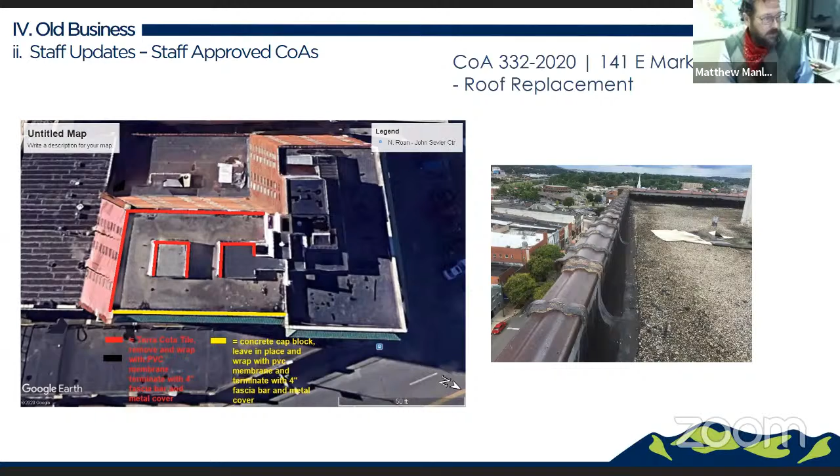As far as updates on upcoming initiatives, I don't know if Hal, if you want to add anything about the potential grant application for the rewrite of the Tree Streets design guidelines.

I will add that Charlie Stahl submitted information to the state for a historic marker for the Memorial Park Stadium—I guess I should say Memorial Stadium, over here across from City Hall. I've just forwarded that application to you all, so you'll see that in your email. Really appreciate Commissioner Forsyth hunting down and doing some research and finding some good information that I think was utilized in that application. I haven't dug through it myself, but I think it pretty much all leans on research that was done by Commissioner Forsyth. So we thank you for that.

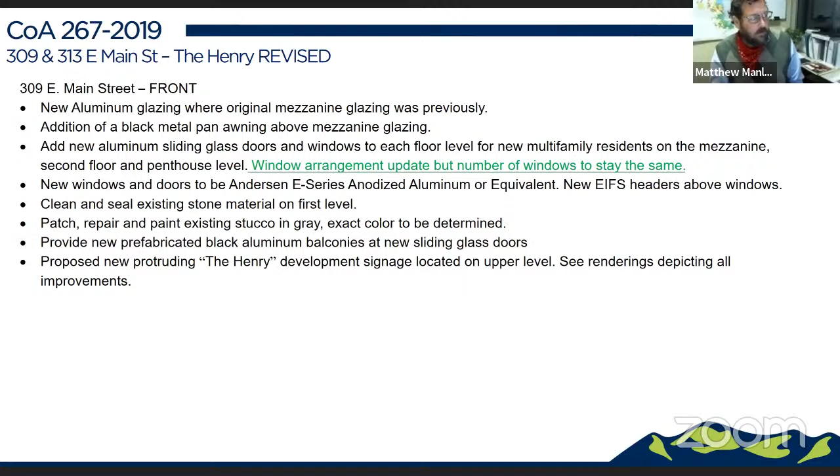So Ryan, what I'm showing you here is just the modification to the description. We're adding a line about the window arrangement on the front of 309 East Main Street. What's proposed is a single window, then a set of double windows, single window, on the second and third floor. What was originally proposed was three sets of double windows.

So one set of double windows has been split out, and I think it actually creates more transparency and equates to the same total window area, just a different configuration. I think it has a nice rhythm to it. I've got some of the design guidelines pulled up, and I think it meets with those. Staff recommends approval of that new window configuration.

So if you want to discuss that and voice any concerns, you could either do a motion, or we can get a consensus and move on to the next part.

Actually, considering we needed to have a public hearing for this, we probably have to hold any motions until after the public hearing. I didn't think about that at first. Yeah, I didn't either, and that seems very reasonable. Let's do staff questions, go through the entire thing, staff questions, public hearing, and then come back through each item to have a deeper discussion after we do the public hearing. Sound good, Nathan? Yes, that sounds very... Okay, good.

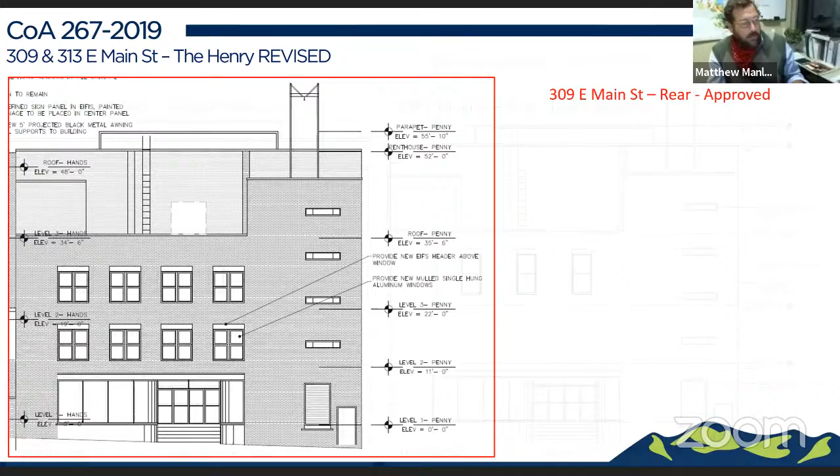They originally proposed a 3x5 window, single window with a single row of three. They've come back since meeting with the design review committee and enlarged those windows to 3 foot 9 inch by 7 foot 4 inch, significantly enhancing the size, but still significantly different from what was originally proposed. You can see on the right side the rendering of how it was originally proposed when this was approved in 2019.

This is the way it is today. Again, this is what they're proposing. The design review committee met and discussed this with them. There was not a lot of opposition to going from double windows to single windows because of the Art Deco style of this building, both on the front and the way the horizontal or vertical windows are arranged. That's a unique window design layout, so single windows does fit into that, it is compatible with that. So there was not a ton of opposition. They addressed some of the concerns by increasing the scale of the windows.

But there are still no mezzanine windows. So it's my opinion, my recommendation, that it's okay to approve the three large windows on the second floor, but I would recommend denial of eliminating all the windows on the mezzanine level. I want the applicant to have a chance to present their side on that.

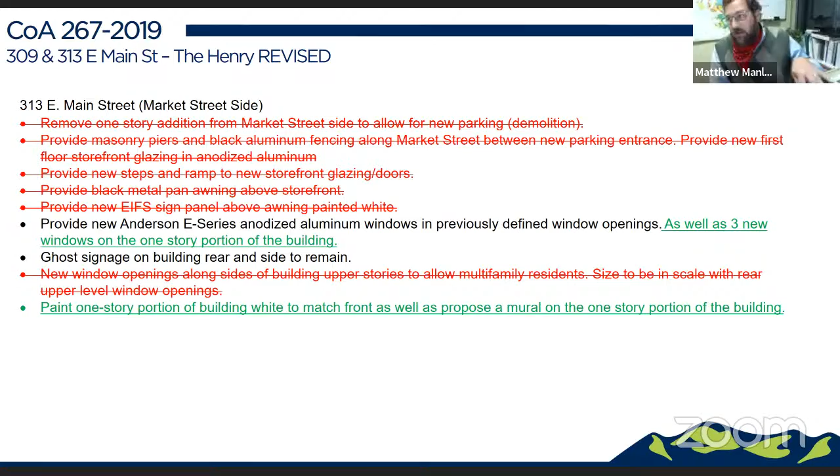Moving on to 313 East Main Street, the rear side. Again, this has a lot of markups, mainly for one big reason. The original proposal was to remove an addition on the back of this building, shown right here. This structure was proposed to be removed, and a storefront and parking area with a street wall of brick and wrought iron, and a ramp for access, was to be put in place. All of those things have now been scrapped.

They want to leave that building in place and utilize it for residential, which is a new allowance within the B2 zoning district. That helps reduce cost and demolition cost, and also helps with some support and structural issues they were facing if they demoed that building.

So how do they treat it? Going from that proposal, they proposed this on the left, which was to punch in 3 windows. They had a good location, above the pedestrian realm, providing privacy for the residents, but the scale of the windows and the spacing was a little off. That was some of the feedback they got from the design review committee.

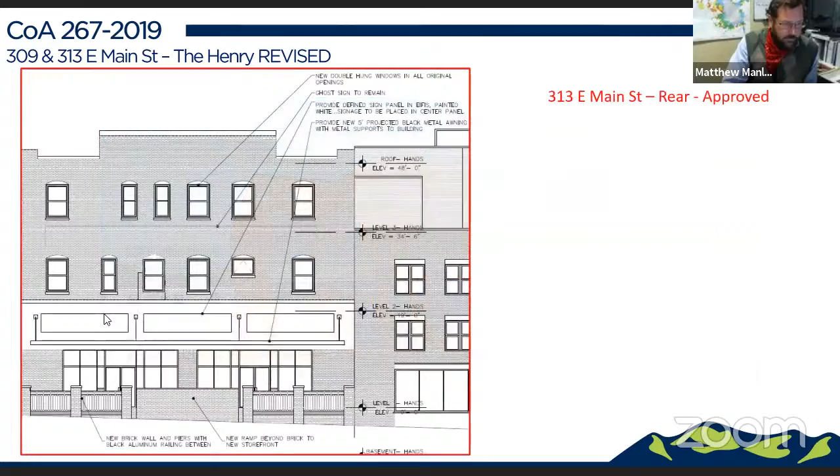They responded with this proposal shown on the right, with larger scale windows, 3 foot 9 inch by 7 foot 4 inch, spaced a little differently as well. I think that does accommodate the type of rhythm of openings, and accommodates residential uses on first floors, which is unusual, but it still creates the type of pedestrian environment we want on Market Street.

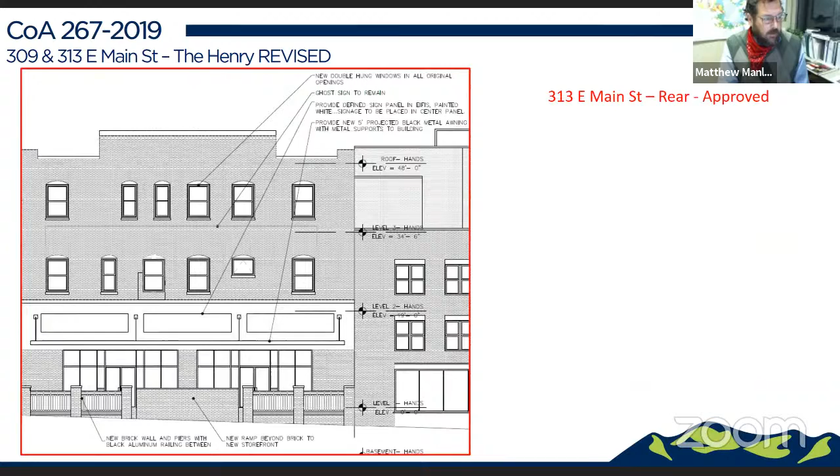So I think in this case they've really done a great job. You can envision the large windows going in there. I think they've addressed the design review committee's concerns and presented a good product here, and it is in line with the design guidelines. So staff recommends approval of the modifications to 313.

Matt, are those top two floors recessed? Is that all just one straight facade? They are recessed, you can see there. So I thought that bottom one would be the first row, first floor, and then setback on the next, is that right? That's correct. So you can't really see that top floor. That's a section view, not a real perspective view. And you wouldn't really be able to see that.

Now there's additional discussion about potentially painting this brick. It is a different brick; it was an addition, not built at the same time. The applicant initially was proposing that, and potentially a mural here. But what they've planned to do is put the windows in, see if it really then calls for painting this to clean it up a little bit and give it some distinction and compatibility with the front of the building, because they are proposing to paint the front of the building, but they're going to wait on that before proposing to paint this brick.

They're going to do the windows first and then see if there's a need for painting it, or any kind of mural to encapsulate any additional space. I think once the windows go in, there's not going to be much room for a mural, though something creative could be done at the pedestrian level, just to line the bottom of the building. Could be neat, but not a typical place for a large blank canvas of brick for a mural, but not out of the question.

Any questions? Having sat in on the DRC meeting, I don't have any more questions for you. I don't know about Wes or Liz. I don't, except for that setback. But the other one would be the windows, but you can discuss that. That's a little hard to understand, but yeah. Right.

Okay, public hearing, Nathan? Yeah, let's go ahead and open the public hearing. There should be a number appearing on the screen here for those that wish to call in.

Oh, sorry. Oh, you're good. There we are. If you'd like to call in, you're watching this live streamed online, Matt will have that number up for you. Right. Okay. Yeah. I'll send Matt an email if you would like. So we will begin our.

Do we have a phone call? No, sorry, that was mine. Oh, okay. We never get phone calls, so well, let's, it's a real.

There's a 20-second delay, so I would recommend that we have the applicant go ahead and start and give their presentation. If anybody else is listening, they can call in. That sounds good. Yeah, if y'all, okay, go ahead, please do.

Phillip, do you want me to talk or do you want to talk? Let me talk first, and then you can get into the technical stuff as well. Okay. So I just wanted to say, one, that I appreciate everybody allowing us to present this project tonight, and taking the time that you guys have taken to spend down here, and making an effort to be on the city staff to help out with this stuff.

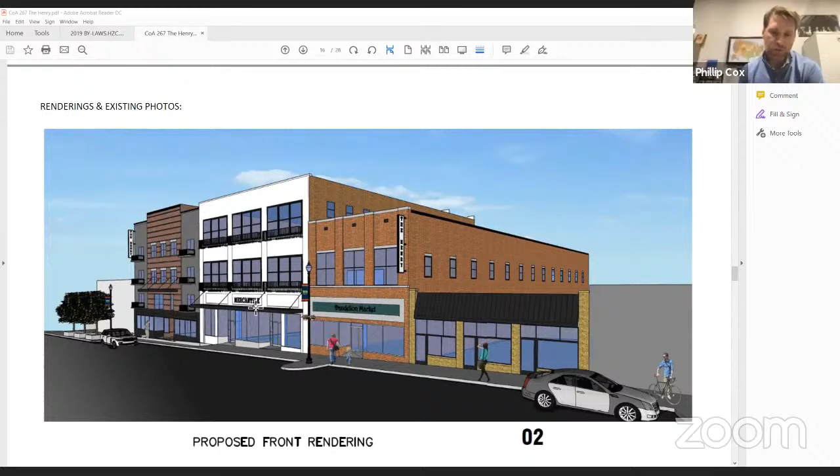So the next building would then be the Hands building, and our real goal for that bottom floor is really in hopes to have some kind of restaurant or some kind of fun user. We were really hoping we could get maybe the distillery that was looking to go on Walnut Street and put them in there, and then have like a restaurant on the second level of the mezzanine.

But the reality is we don't know what that's going to be yet. There's some bathrooms in the back right now. And what we want to do is get the multifamily started, because we're ready to move forward with that, and we want to get foot traffic and people in the buildings and going.

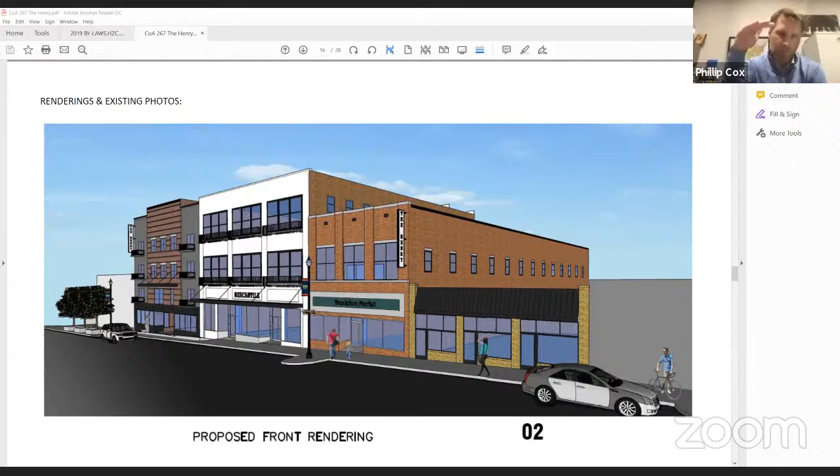That was the logic behind making the changes to the Sears building, the Hands building, which we appreciate staff's approval on. And then also the changes to the front of the JCPenney building, which again we appreciate staff approval on. That's more in line with where the bedrooms are laying out. And then on the back side, again we appreciate staff approval on the upper level, because that's in line with where the bedrooms are.

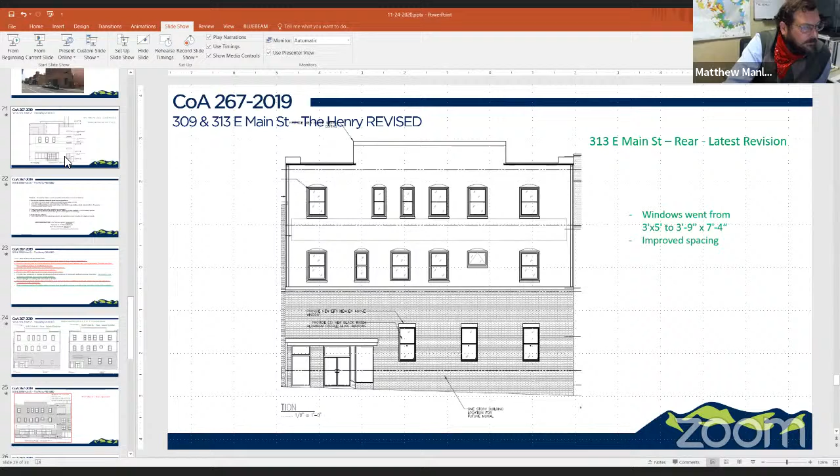And Matt, could you show that back level, the Penny building? 309, correct? Yes. So again, staff has approved, or suggested approval of, the top windows.

Again, that goes in line with the configuration of the multifamily. The reason we're asking for no change on the mezzanine level is because we just have no clue what we're going to be doing there, and we have to be able to move forward with the multifamily in this project.

Which will be on actually the third floor — I don't know if it's considered the second floor, but wherever those windows are. And then there's like a penthouse type area above that, which we'll be putting some units in as well, plus we'll be filling all the units in the Hands building.

And the way I'm understanding this is, in order for us to get a CO, we have to be completed with all the improvements we're making for the multifamily, and we don't want to start the project if we can't get that CO. So that's why we're asking for no change on the bottom.

When we have a user, we will come back to you guys with a proposal for that, because at that time it's going to make sense to do something different. But right now there's an existing bathroom — I think Kattie, if I'm correct, is kind of where one of those windows would have gone — and there's no reason for us to demo that bathroom if a restaurant may need to use that one day and we need to modify it, but we just don't know what we're going to be doing there.

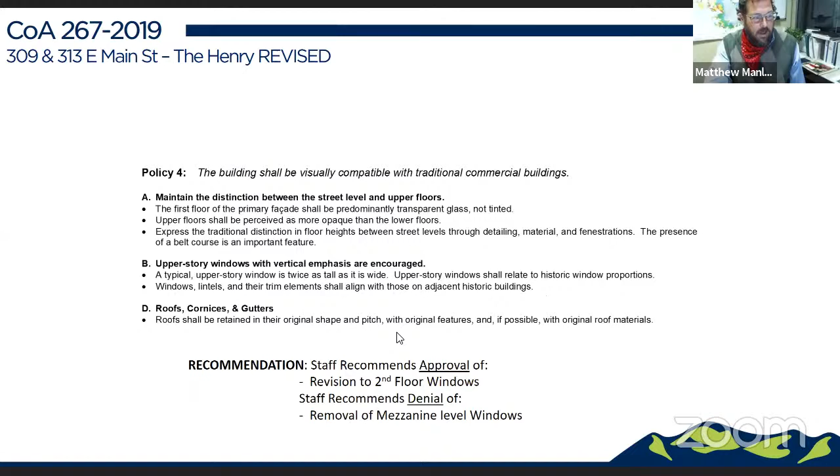I think one concern voiced in the design review committee is that, from the Historic Zoning Commission's standpoint, what was approved is a storefront, full-on appropriate downtown commercial space fronting on Market Street. And now to go back to this, which is, for lack of a better term, a watered down version of the back of this building.

With no guarantee that it's going to be addressed in some fashion moving forward, if they were just to eliminate what had already been approved for the second level. So that's a risk that the Historic Zoning Commission is being asked to make.

I'm curious if there's any potential, if this gets approved, if they're okay with the approval of the modification on the second floor, if you would be okay with adding that same configuration and scale so that it's reduced from what you originally asked for and were approved for, but it doesn't completely eliminate it. So I just want to add that to this discussion.

Jay, other commissioners, feel free to tell me that's dumb. But I think this is maybe a compromise versus, yes, I see how, if you had more information and more knowledge of what was going to go in there, then you could accommodate more specifically. But we don't have any of those specifics to then back completely off of what was already a really good proposal and approval originally in 2019. Does that make any sense?

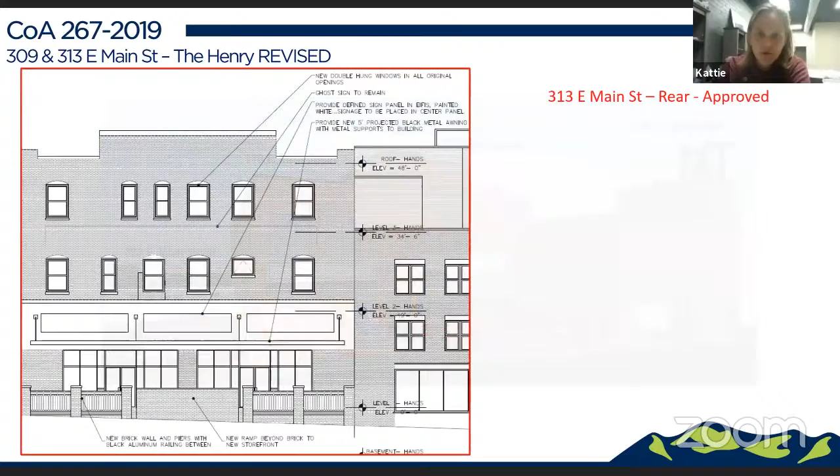Okay, the applicant, any other comments based on what you've heard? So I don't want to speak for Phillip, and I'd like him to comment, but I don't think we are 100% opposed to adding the windows like you were suggesting, Matt. They would have to be smaller, they wouldn't be able to be as tall vertically, because that ceiling is not a tall ceiling on the mezzanine level.

Again, we can't justify putting in storefront like we have on the front of the building, but I would love to see that happen if we had a user for this building that was going to take it. So I really hate the idea to just add additional windows that will meet the potential approval but could have been a whole lot better if we waited for a user.

Yeah, and I appreciate that input, Kattie. I guess I feel like the commission's question for y'all would be, what guarantee do we have that something will happen? Because the current proposed windowless mezzanine level is not really acceptable, but putting something else in there sounds great. Right, it's something we could totally accept.

So one other question I have: you guys have a development agreement, Phillip, with the city, as the city was the seller. Does that come into play with this at all? Is there a timeline? Is there anything else you can add from that side, or is that not relevant?

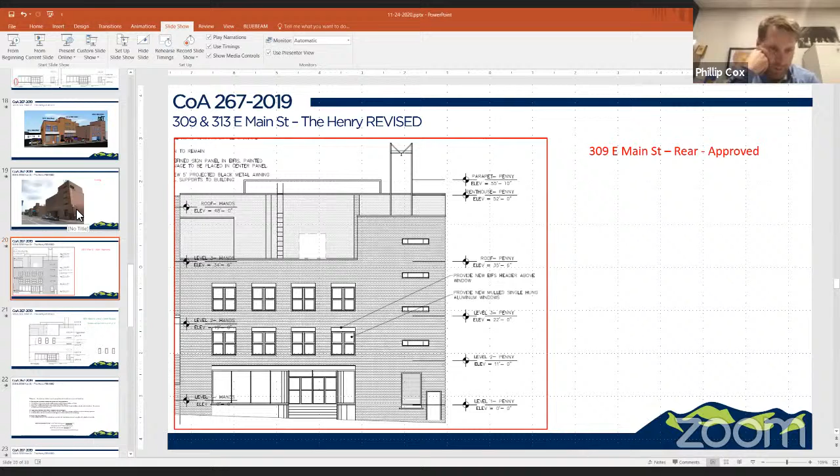So the one thing I think Kattie kind of nailed it. If you all want us to put those same windows in that are on the top as the bottom, we can do that. But that's what you're going to have to live with. We're not going to ever change it if we do that, because we won't be able to ever change it.

Or you can take a little bit of a leap of faith with us and say, hey, look, we don't like what we're seeing now. But honestly, guys, that's what you got right now. If we do nothing to this building, that's what you got right now. So take a little bit of a leap of faith with us.

We've done nice stuff throughout the community. We've also done a nice job on the first two buildings. So we're going to try to do something nice on this mezzanine level, but we have to be able to start these apartments. If we can't start these apartments, then we are not going to do anything to both of these buildings, and we're just going to quit, because we have to be able to put this multifamily in, or it's just a dead project, period.

I guess that was my question about the development agreement, about how that went, because I know the property was sold. And we're happy to sell it back to the city if they want to develop it themselves. So the development agreement is a development agreement. It's not a contract. It's a, hey, we're going to try to do the best we can kind of thing.

One of the reasons I mentioned before is that Abernathy designed this facade the way it is without windows there, and he did that on purpose. It's designed to not have openings there, and I think that's part of the problem, that we're trying to put windows where it was originally intended to be a blank wall.

So whatever we do there needs to honor that, and it needs to honor the style, the Art Deco style of the slot windows, and with this brick, it's got the brick detail, we got the curved storefront, all that stuff we talked about before, but it needs to honor these things.

You also kind of functionally, there's a louver that's sort of over the entrance. You can see it in the street view. There's some other things that just kind of functionally get in the way. Maybe that's not an issue, but it's another element we haven't really thought about or talked about.

I do have a question for you guys though. The brick detail that shows on the facade, to the left of the actual windows in what I kind of think of as the tower area - it doesn't show up on your elevation. Were you intending to do anything with that? No, we plan to leave that as is.

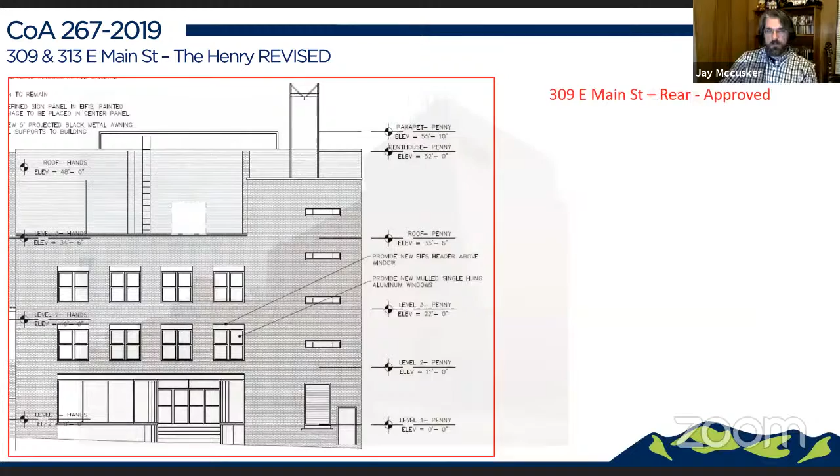Okay, because that changes the composition of the facade. By not having it there, that space that reads between the proposed windows and those existing horizontal windows isn't really there.

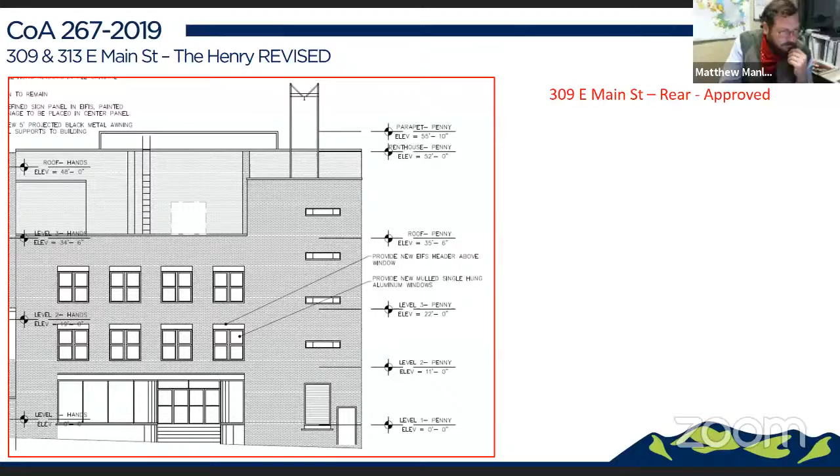So when we look at this, I think it's important to look at the elements as they would actually exist. But I'm glad you're not looking to do anything there.

So my next question is, have you considered doing anything on this upper floor other than trying to center them on the storefront? My question would be, I guess what I would ask is what thoughts do you have?

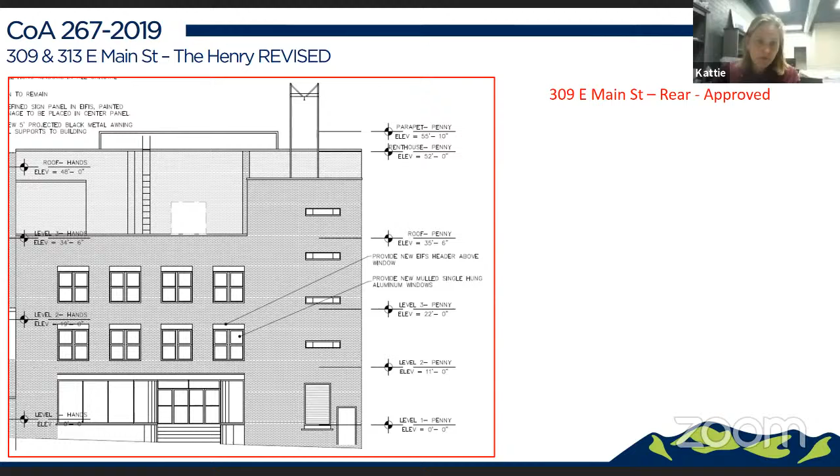I'm thinking, Matt, if we could go back to the current proposal, thank you. There's a proportion to the storefront windows as they exist now, and it reads very well in this drawing that it's basically a strip of storefront divided into roughly 7 equal sections. It's a little bit different at the door and where the curve comes back.

But if you push the windows to the left and center them on every other panel and just do those 3 windows, I wonder if we might get a better composition on this facade. So that's why I wonder, have you looked at anything that was not symmetrical? Because Art Deco design is not a symmetrical design by and large, and this facade certainly isn't.

So would you need, I think, 4 windows? What we need is a non-symmetrical solution, because we're trying to put traditional windows, quite frankly, into a non-traditional building, and that's, I think, part of what the issue is. I'm just really appreciating what you're saying here, Jay.

I would be very interested in hearing y'all's perspective, Katie and Phillip, based on that feedback. If you guys could think maybe outside the box a little bit.

Well, Katie's probably best to answer this, but obviously where the horizontal windows are, that's a stairwell, so you can't get too close to that. I just assume Katie put these windows in line to meet with where the multifamily units were, and I assume that's either a bedroom or a kitchen or living area or something like that. So I don't know how our floor plan aligns with that.

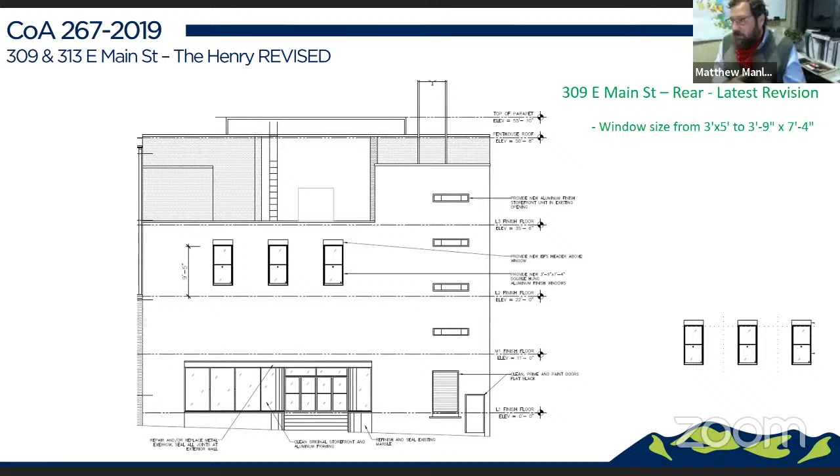Well, I want to know, I guess in the form of a question, this is going to go right to Katie, and I know she should respond to the earlier one as well, but what is the relationship of these 3 new windows to the existing facade? And I'll just kind of leave that broad question, and I just want to know what the thought process was.

Sure, so I can tell you part of it is definitely floor plan driven, but if you go back -- can we go back to that, thank you. So what I was trying to do is if you look at the second panel of glass of the storefront, they do align with each other. And then that second window aligns with the storefront below, and then I kept equal spacing between the windows.

So that may have been, you know, ill-advised based on what you'd like to see. One thing I can say is if I can move that window over, if I align the left-hand window with the left hand of the storefront, I don't feel like that hurts anything.

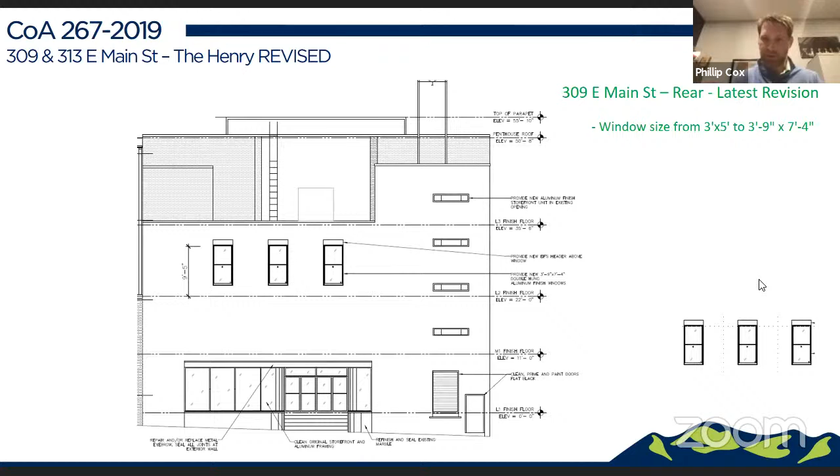This is for anybody—if this was left blank, is there potential for a sign panel or something that would break up that space?

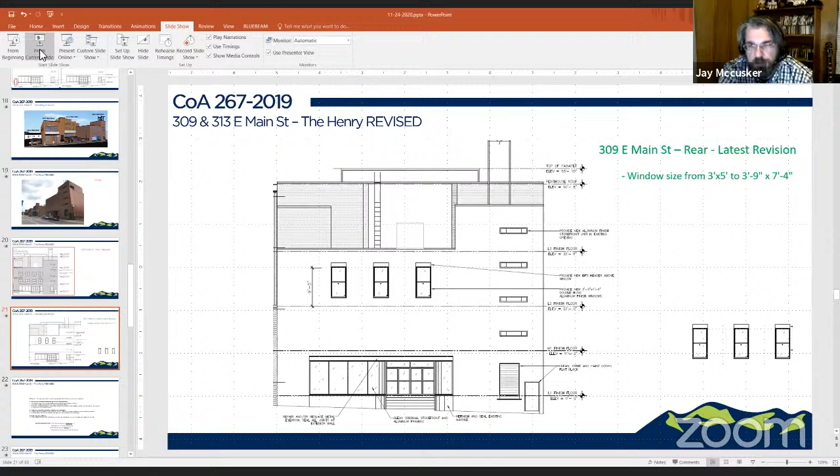I think honestly that it reads as, you kind of think of it as white space. It's the space in between that gives the elements you do put there more importance. Yeah, I would agree—I think it's there on purpose. If you leave it just as blank space there, it kind of fits in with some of the more modern Art Deco type situation. I don't think it needs to be a sign panel or anything of that kind.

So if that was left blank and there was just a modification to the windows, from a motion standpoint, I think you could frame a motion so that the applicant makes some final revisions, submits that, and staff would approve those modifications to the rear of 309. And if you have no issues with the front of 309 and the rear of 313, then you would just motion to approve those as presented.

If there is more of a desire to see something on the mezzanine level included, then we could discuss that further. But if people are leaning towards nothing on the mezzanine, I think it's pretty straightforward that we would just have the final tweaks approved by staff.

Kelly Duggan, who is part-time and has a lot of historic experience, some of you have met her—she is on the call. Kelly, do you have anything to add from a staff standpoint about structuring a motion, or anything you've heard tonight that you would want to weigh in on?

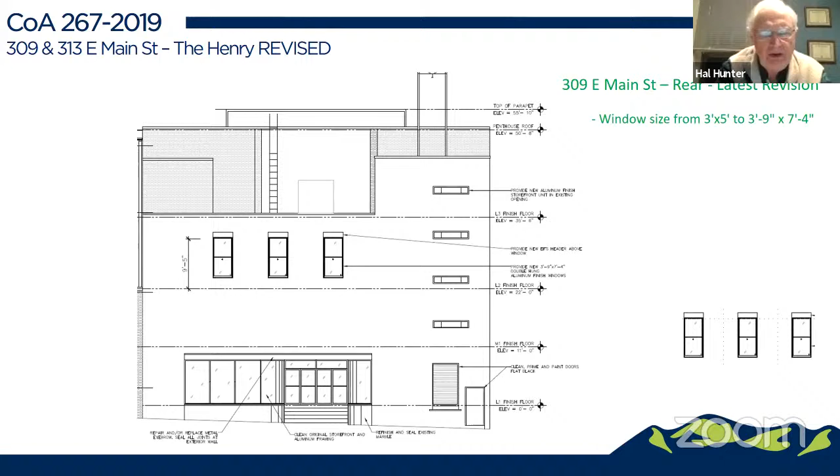Nathan, you got anything else to add, or can we get close to a motion here? I think I would like to go ahead and close the public hearing if we have nothing further. I've got one more question—are we talking about public hearing on the whole thing, is that correct, Matt? Yeah, yeah.

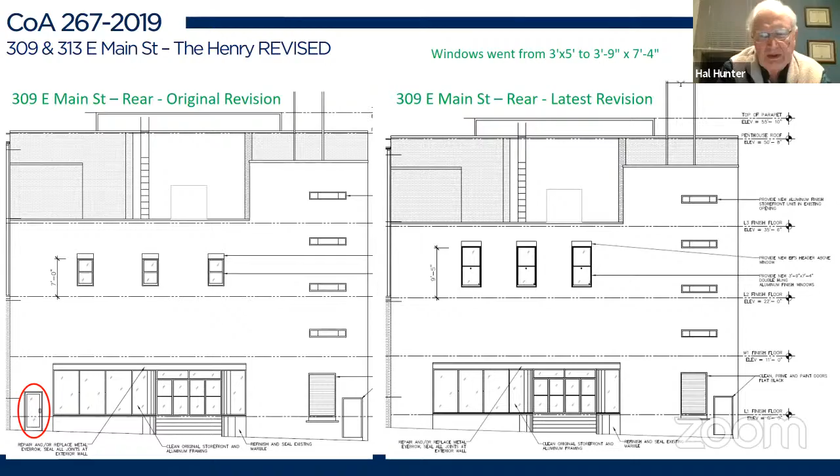I've got a question going back to the 313. Why are they proposing to paint it white? I think they did say something about holding off on painting it at all until they get a look at it and see what it looks like. But I have a real problem with that building being painted white.

I thought that had been removed from the front of the building. You don't see the front and the rear at the same time. Well, I don't think anybody has a problem with that. That's why we pretty much said let's hold off on doing anything, let's see what it looks like.

Okay, yes, we're completely comfortable with not doing anything besides adding the windows. The problem was that was in their original proposal, and it got in the staff report and the presentation, but they took it out of their revision submitted today. The illustration got updated, but the text did not get updated.

Okay, good catch there, Matt. Thank you. Yeah, I do appreciate that. Matt, I know you guys want to close the public comment, and I'm fine with that. And I would love, Jay, for us to talk further if possible, I am 100% open to that. I did send you an email.

I did move those windows, but one thing I want to note - I can't move them in the exact pattern you would want, based on where there's a living room and bedroom, in order to keep them at least within their rooms.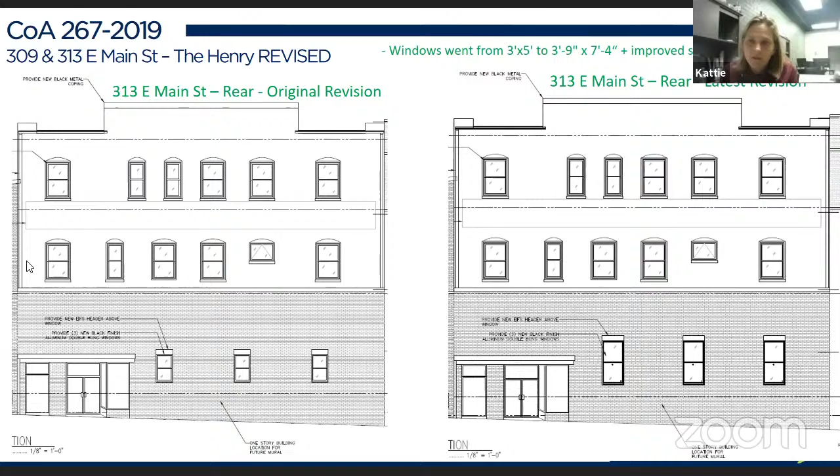On the 309 building - did my email come through, Matt? Yes, I've got it. So I'm just trying to show where I could place those windows to correlate with the storefront. Again, I'm happy if we can work through that together.

I'm more than open to that. I think, just looking at it quickly, it looks very much in line with some of the comments I've heard. I think that's something we can fine-tune outside of this historic zoning meeting.

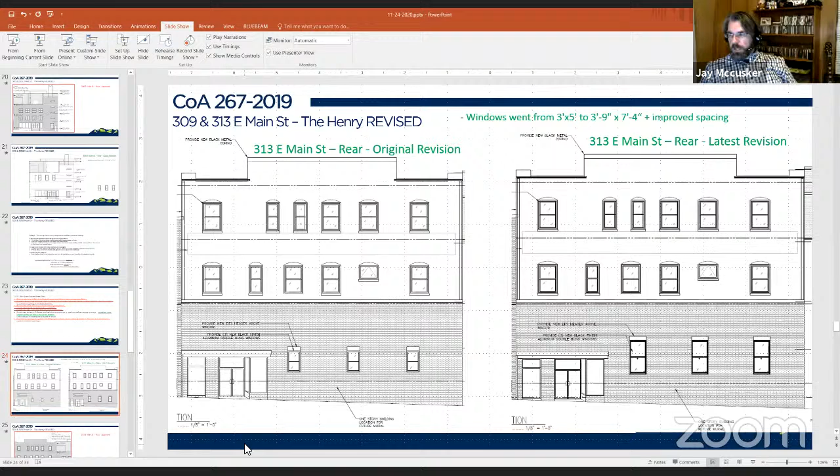Okay, yeah, I want to quickly say - for 313, I think that's much better, I think that works. So unless anyone else objects, I'd like to move to the front of 309. Yeah, that's fine with me.

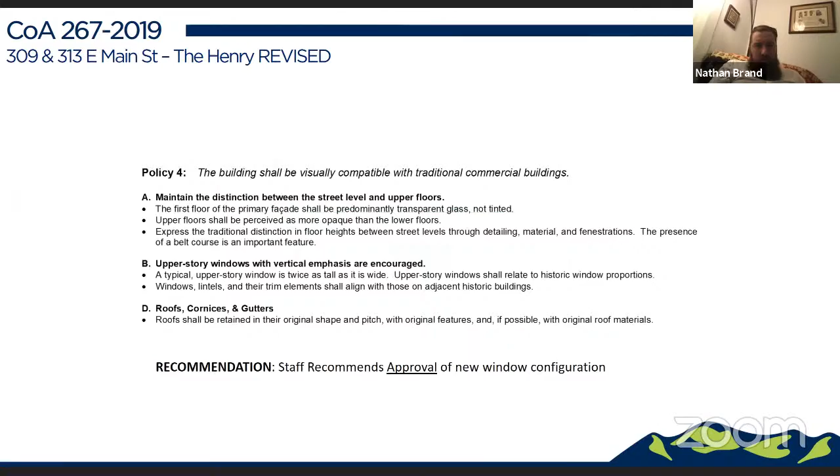All right, thank you. So my question here is, we're rearranging the windows - rather than 3 double windows, we've got 2 doubles and 2 singles, and it looks like the window heads and sills have changed as well. No, the window sills and heads have not changed. Okay, I'm just comparing the drawings, and they show up in different locations - at least it appears they show up in different locations from the original proposal to the newer one.

For instance, the sills of the middle floor, the second floor, align with the panel joint - they kind of align with the head of the panel below, but they do not in the updated version. Yeah, it does look shifted. So I guess my question is two questions: what necessitated changing to single windows on the side - was that part of the original openings you're trying to capture, or what happened there? And then, what is the relationship between those existing panel joints and the window heads and sills?

So the separating out of the windows to have doubles and singles happened because there are columns within those walls. I wouldn't have been able to keep a consistent pattern - I would have run into a steel column if I kept the 3 double windows. So that is what drove that. There's actually a steel column between each single window and the double windows. Okay, that's unfortunate. Yeah, tell me about it.

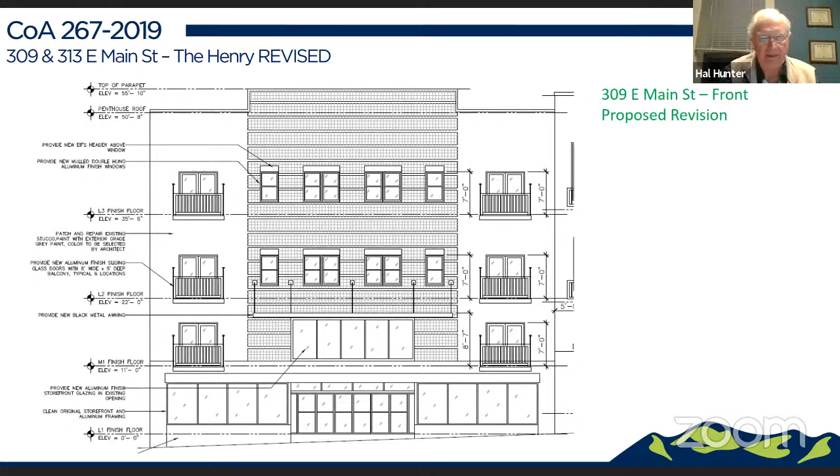Was there somebody else who jumped in there? Maybe it was Jay. I honestly think the relationship between the brick bands and the windows is paramount to those other considerations. Because I look at this and it looks like it's just slightly off. It looks unintentional.

I agree with that. This is a bit of a unique situation. Now, did you say that this building originally had openings punched in this wall, or are these all new openings in the wall? These are all new openings in the wall. The portion that had windows was the mezzanine level.

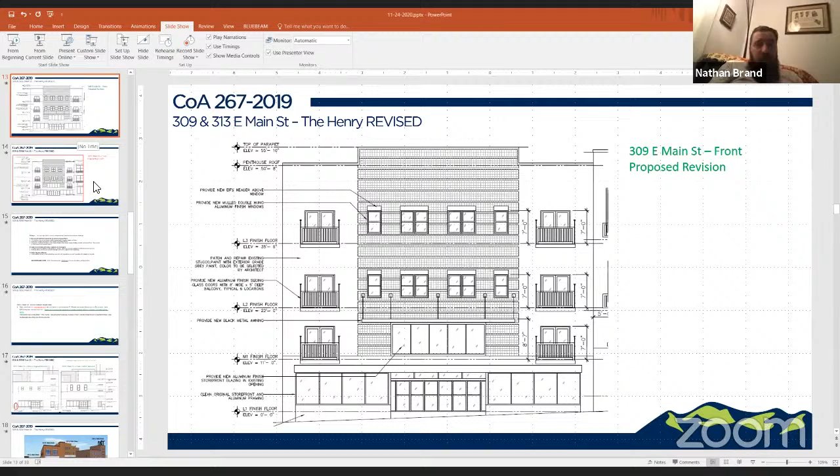Okay, all right. Well, unless we have more questions, the next step is to close the public hearing. Do we have more questions for the applicant, or should we work on our motions here?

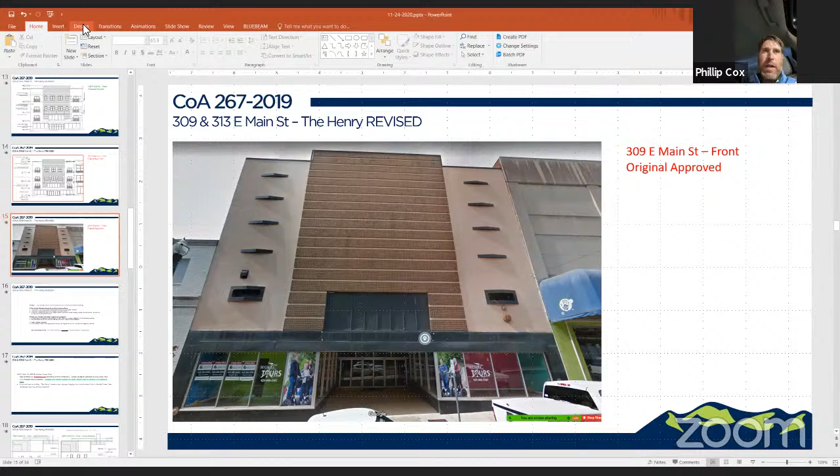I would suggest we close the public hearing. I think we're close to a motion here. I think we did note that Jay had further detailed concerns about 309 Front, but I appreciate those comments. Honestly, that's the first I've seen that revision. I don't think that was part of our discussion last week, so I was surprised to see it. Yeah, it does seem to be slightly different with where it aligns with the brick.

Now, I can tell you that it is not different from last week. Nothing changed from last week. Yes, that's right, there were no modifications on this. We did not dive into detail on this one in our DRC. We were focused on the rear.

So again, it sounds like slight modifications might need to be considered, some tweaks through DRC review. I would recommend, if there's no overall objections to the splitting out of the double window to single windows, that's the main revision. And if there are some slight tweaks between what was originally approved in 2019 and where these windows, headers and sills align with some other architectural features, and that's slightly changed with what we've received today, that we can review that before final approval, just like we would review the slight modification to the rear windows as proposed. So again, a motion for final approval through DRC review, but generally, general consensus for approval as presented.

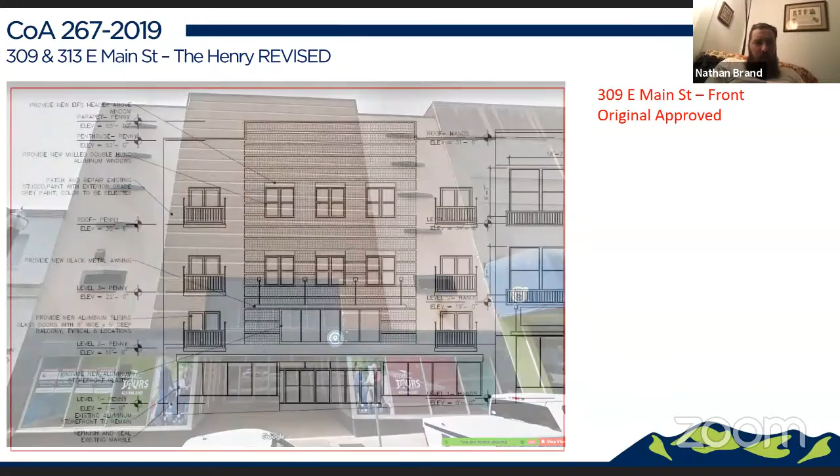All right, well, I'm going to go ahead and close the public hearing then, and we can begin the deliberations. Seems like, Matt, you want to help us just go through, and Nicole, if you want to make sure to take notes here. It's going to get complicated, I think.

So, 309 Front, it would be as proposed and presented by staff, with additional consideration for final placement of the windows with approval from or review by the DRC and staff approval.

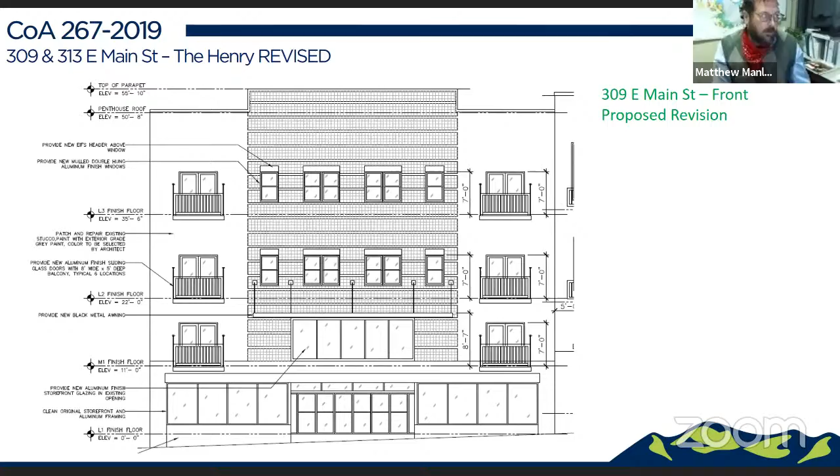I would be comfortable with a motion to that effect. If you do this with the DRC, do you come back to us as the commission, or just go ahead? No, you would essentially be giving staff approval to make the final approval. So it wouldn't come before us again? Correct. Staff would make the final approval on the recommendation from DRC.

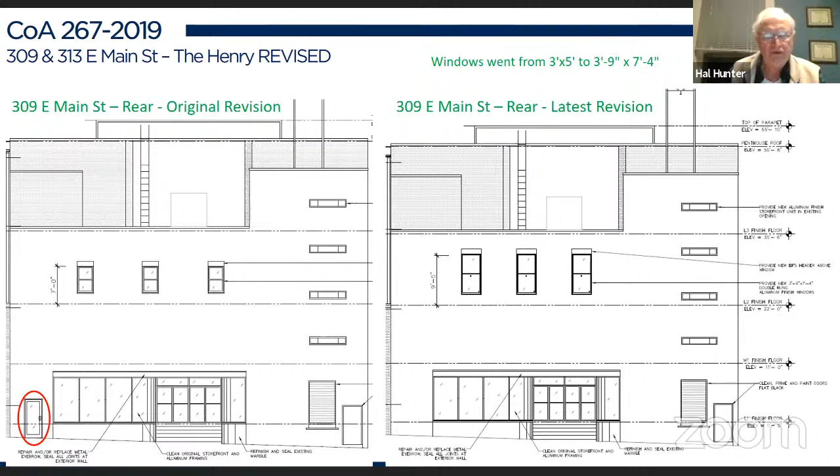Gotcha. All right. I would move that on the facade for 309 Main Street, that we approve those changes with the understanding that the windows will be lined up with the brick banding and be brought back to DRC for final review before staff approval.

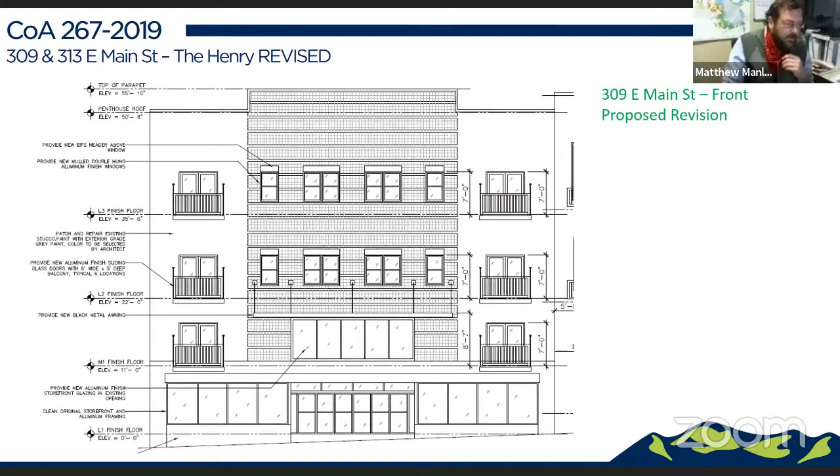We have a motion. Do we have a second? I'll second it. I do want to point out the differences between what was originally proposed - it doesn't all align with the brick banding. Only the second floor does. The third floor does not.

So I don't know that it'll work just perfectly like that. We also have heard tonight that the representation of the brick may not be precise. And so what we want to do is have the DRC review it and give some specific language to the applicant of what they're okay with, what they need to look for when they've got the specific brick, what they need to attempt to accomplish when they go to put these windows in.

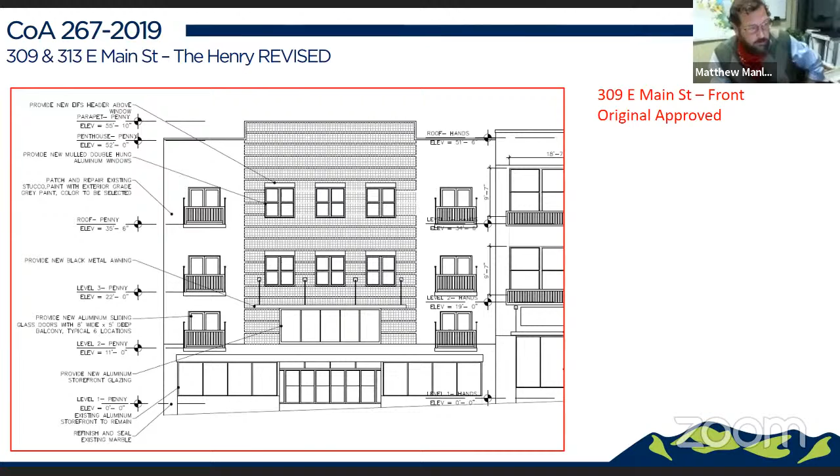I would just say, as presented, as approved, with final consideration by the DRC, with staff doing administrative approval, and we can have a more detailed conversation at the DRC level. And we're saying that would be a blanket statement for all three facades, essentially.

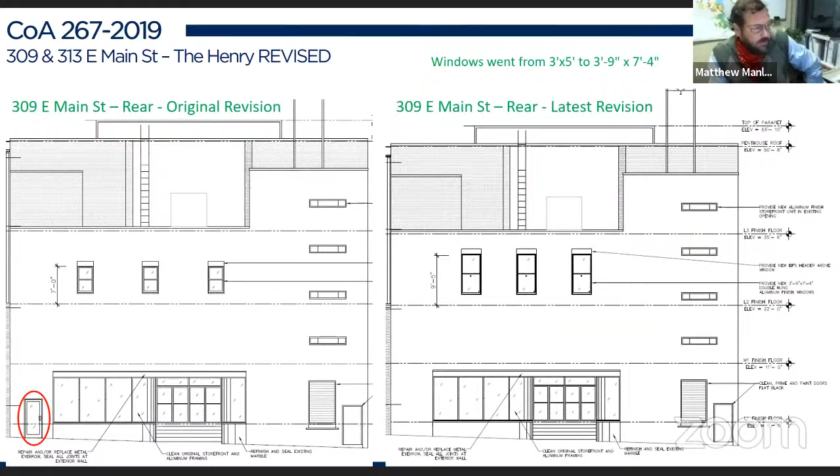Yeah, except for - I mean, you could do that. That I suppose works, maybe just for 309, and then 313 is fine. Yeah, and that may help this applicant go ahead and get started on 313 with some. Right. But I still expect this to be turned around really quickly.

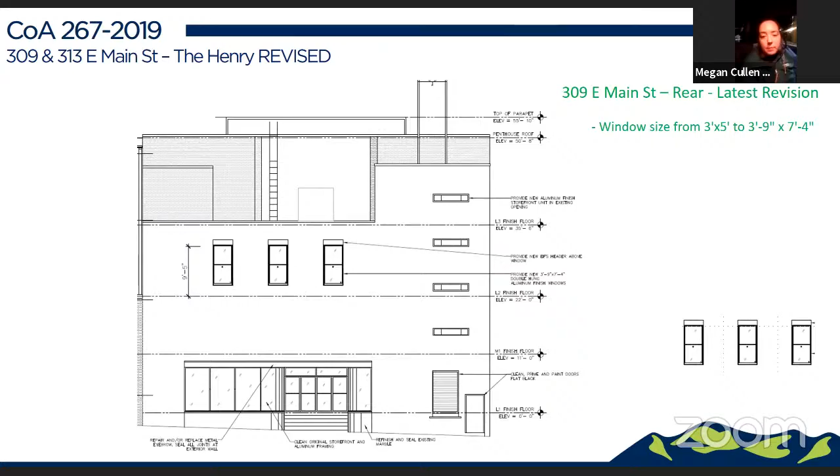Agreed. I would just like to throw out too, I don't think it needs to be part of the motion - I would feel more comfortable if the chairman sat in on the DRC meeting. I know Nathan, you're an alternate already, but I think if we could be at full capacity for going over this - I personally would like that, but I don't know how everyone else feels.

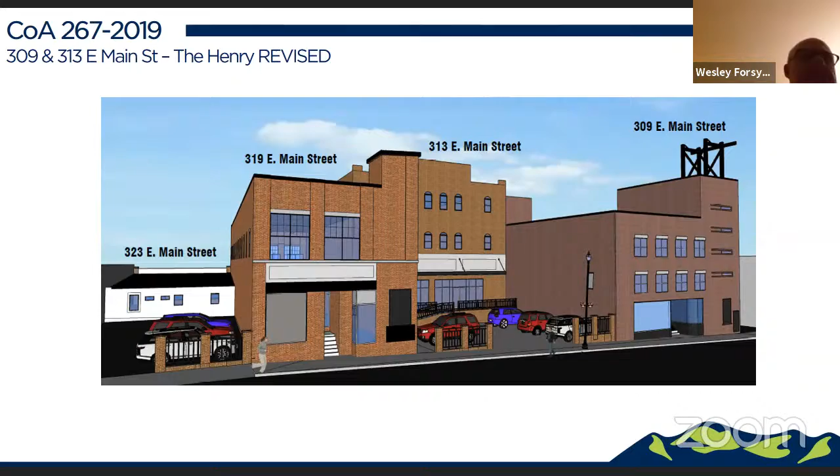I'm happy to do that. Thank you. Yes, sounds good. Absolutely. So, Hal, you were making a motion.

Yeah, I started to make a motion, and this is basically on 309 on the Main Street facade, that we approve that with consideration - how do I want to phrase this - with consideration for looking at the placement a little more clearly and aligning them up as best as possible, maybe with the brick. Depending on how that works, I'm not sure exactly how we can phrase that.

I would just say: final alignment of windows, consideration to existing architectural features. Right, that would be good. Because I really don't have a problem with the original where the upper floor kind of cuts into that one band. But the first floor, as Jay pointed out, I think that is significant because you've got the band and then just maybe one or two bricks above it, you've got the window starting. And I think that is distracting.

Well, we still need to confirm that what's in reality is also what's shown in the illustration. We don't know that yet. So we've got to get additional information. I'd like to see it all as one motion. Well, I would add on to that.

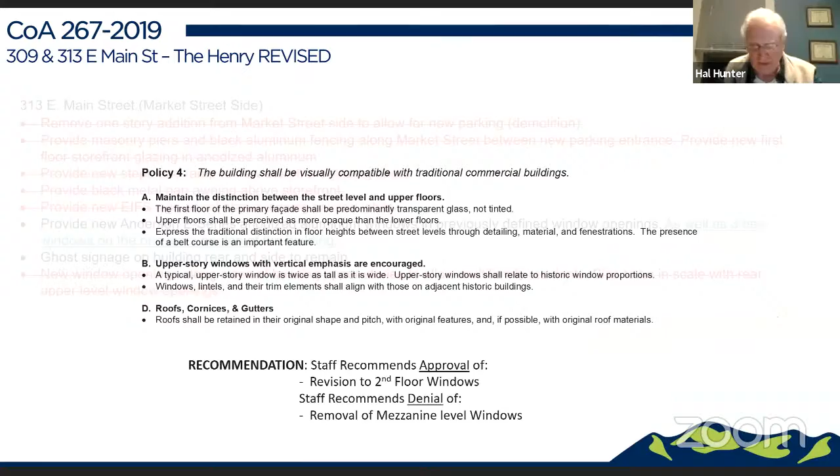And also that - what am I on here - and this would only be on the second floor. The mezzanine level would be left blank. As presented, correct. But Hal, my understanding is that the commission would prefer that the motion includes...

...the proposition that the mezzanine level would have windows at some point in the future. Is that correct? I don't agree with that. I'm not going to make that motion. That's right. Okay, I'm not going to either. If somebody else wants to put that in, that's their point. I have no problem with that mezzanine level being blank.

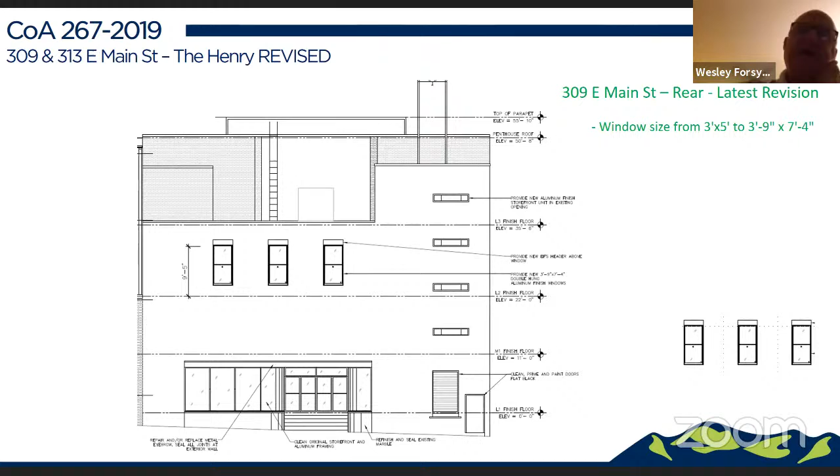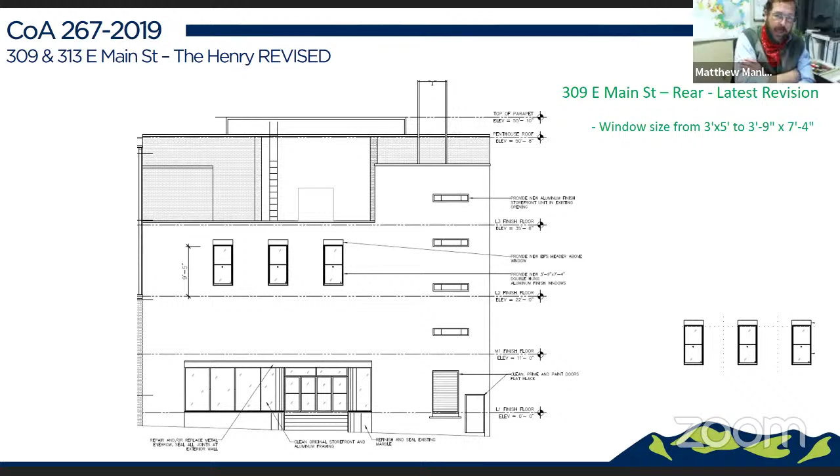Chairman Brand, what I think would occur is if a tenant wanted to come in there and they wanted to have that mezzanine level with windows, they'd have to come back to the commission and make a case for doing that. Right. And it would have to look better than what is there now or what the proposal will finally be.

We have to trust these people because they have done a lot of work in this city. So I think we kind of need to trust them.

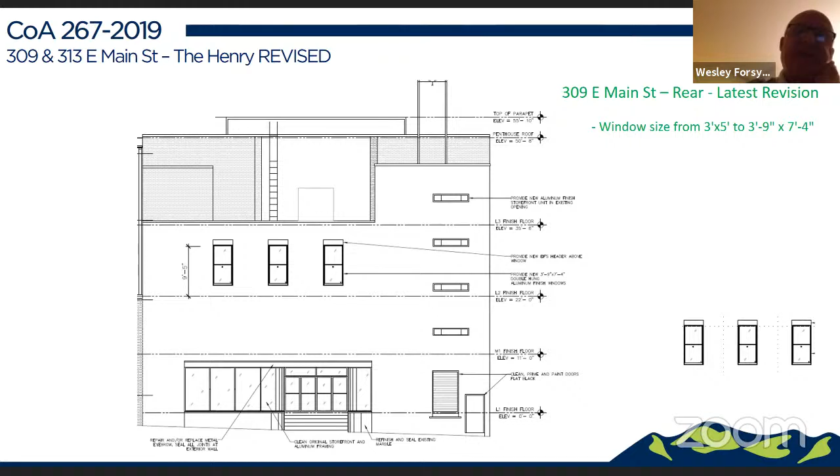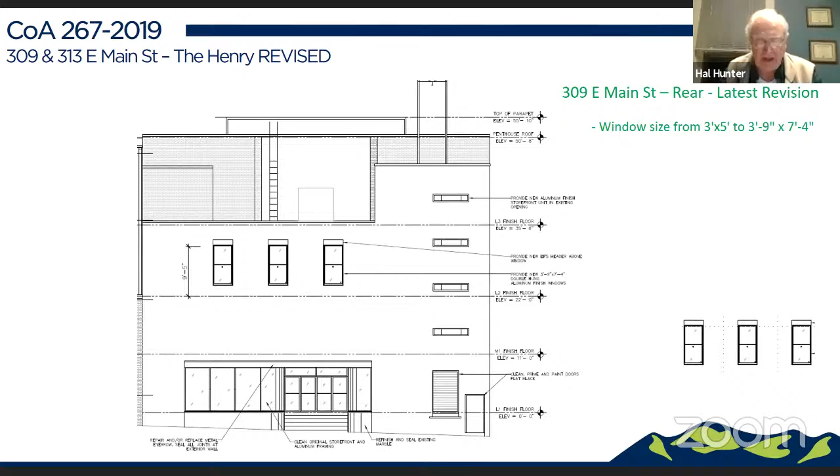I think that's all I was going to say about 309 on the back, and then 313, we are approving that basically as presented. Correct? That's correct. So this is a complicated motion - do all commissioners understand the motion being made? Yes.

Do we want to have Nicole read it back to us? I can. Okay, that'd be good. I've got 309, final alignment of the windows to the existing architectural features on the front. 309 in the rear, approve windows on the second floor with spacing adjustment with DRC and staff approval. Mezzanine level would stay blank. 313 as presented.

Only one adjustment - where you have for the rear of 309, you say consideration by DRC and approval by staff, take that same sentence and add it to the end of the description for the front, the first one, 309. Okay, gotcha - both of them. The DRC is going to do two of the facades, is what you're saying. Both sides of 309. Gotcha.

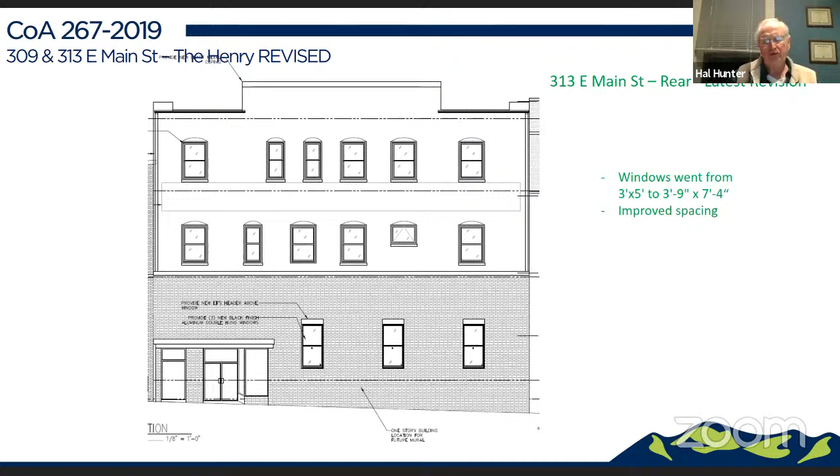So this would approve 313 and give them permission to move forward tomorrow if they want. That's correct. Are we waiting for a second? We are. I'll second. All right, we have a motion and a second.

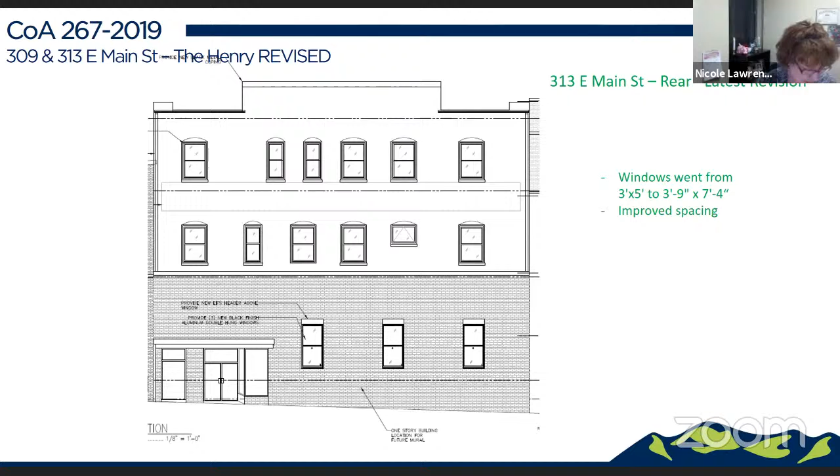Ms. Lawrence, will you call the roll, please? Commissioner Biasca, yes. Commissioner Forsyth, yes. Vice Chairman Hunter, yes. Commissioner McCusker, yes. Commissioner Tool, yes. And Chairman Brand, yes. Motion approved as stated.